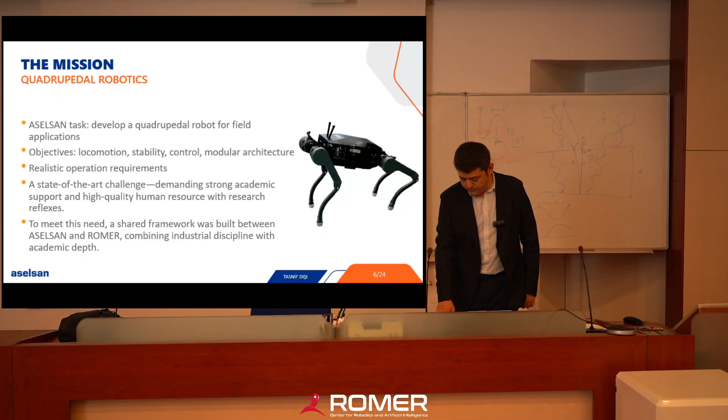So our mindset was product-oriented from day one. We had to deliver a usable, field-ready system, engineered for operability, not just for experimentation. So the TRL definitions were our guideline from the beginning. We were trying to develop a system which is TRL 7 or 8. I emphasize this point a lot to my newly started colleagues. The concept of technical readiness in designing a product is very important.

Producing something which works most of the time is not enough. When you are working in industry, you should be answering lots of questions, doing lots of extra work to come up with a product. And in this project, our aim was always coming with a usable product.

And the quadrupedal robotics was a new territory. We should define the concept of operations with requiring authority. This was an essential task. And by the requiring authority, we mean such type of movements.

This is a realistic operation case. So when we give a robot to a military personnel, they tend to behave like this. This is not a wrong thing, actually. They are working in the field, in very harsh conditions. And the thing that you supply to them should be robust enough to withstand such loads.

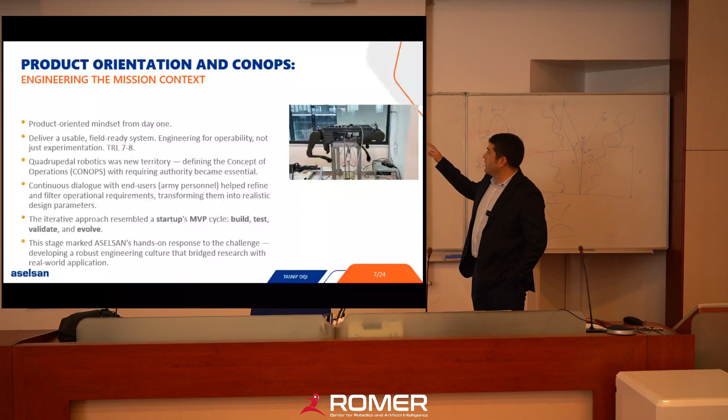So I will continue. This is how our design cycle evolved. First, we started with a single leg, then 2 legs. After that, we managed some tethered walking tasks. And before the project was closed, we were able to walk in different terrain conditions in the blindfold form efficiently. So this was, again, an evolved design sequence.

So the next part is, I think, the most important outcome of this study is the concept of robotic system engineering. So when we attacked this problem, we were aware of the fact that robot locomotion is only one problem. So the rest is system design. If you are after a TRL 7 or 8 level system, you should design a total solution.

You cannot just focus on locomotion software, but you have to focus on the total problem. And this requires a solid systems engineering framework. You need to make trade-off analysis under SWAP-C constraints. And you should integrate different disciplines together within the scope of the robot limitations. And within Aselsan, we developed a robotic system engineering sense in a multidisciplinary fashion.

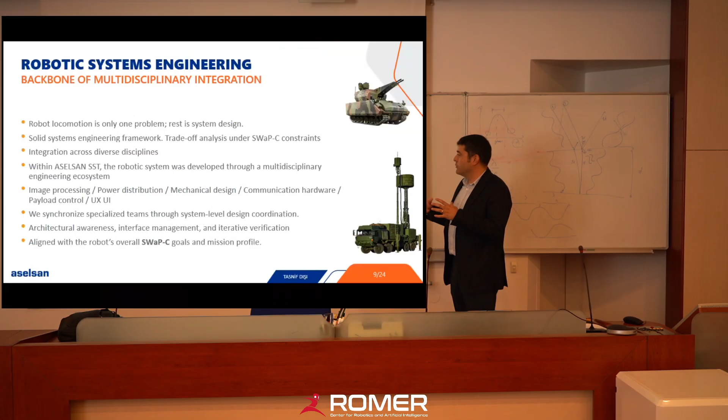It should be small, it should be power efficient, and our most important task was forcing every other design team to fit in that envelope. The SWAP-C goals were the most important goals that we sought for during this analysis.

And actually, this process was powered by a complete shift in mindset, and we had to move away from our comfort zones. By comfort zone, I mean it can be a proprietary, big closed workflow like MATLAB or MathWorks solution sets. We had relied on those type of expensive solutions to get a reliable and fast solution in our other type of systems. But in robotics, since it's an evolving and new area, you cannot rely on a proprietary software.

It was a hard task for us, but we managed to do it. We developed a seamless real-to-sim and sim-to-real bridges. What we see on the simulation most of the time would be what we see in real world. The simulated software could always be exactly exported and embedded in hardware. We forced ourselves to work in that fashion.

This was important. We used MuJoCo integration for physics simulation, and also a real-time balance and torque-based control is implemented with my team members. So our first prototypes were called Demir 100 series, which were built on COTS state-of-the-art robotic platforms, the ones you see above.

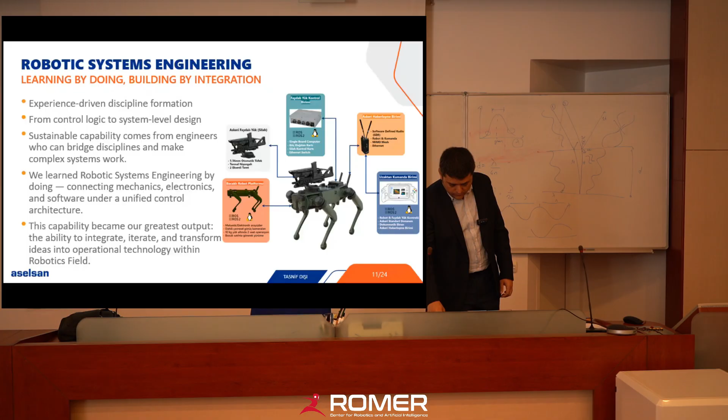So the next part is actually giving some details about what we achieved with ROMER, because all of the things that I have explained so far were conducted with Aselsan and ROMER collaboration.

So this concept, actually ROMER's role was idealized by Professor Dr. Erol Şahin. In a meeting, I think it was in 2022, he proposed the idea, he proposed his vision about how an academy-industry collaboration should be. He underlined that the academy should not be considered as a subcontractor, but as a co-developer.

So this idea resonated with me and with Dr. Mert Ankaralı, and together we formulated this collaboration. This collaboration, after it was put forward, was realized primarily with those professors, and Dr. Uluç Saranlı, Dr. Afşar Saranlı, Dr. Ali Emre Turgut, and of course Dr. Mert Ankaralı. They were our academic mentors and technical feedback-giving authorities. We conducted a co-development of algorithms and architecture together with them.

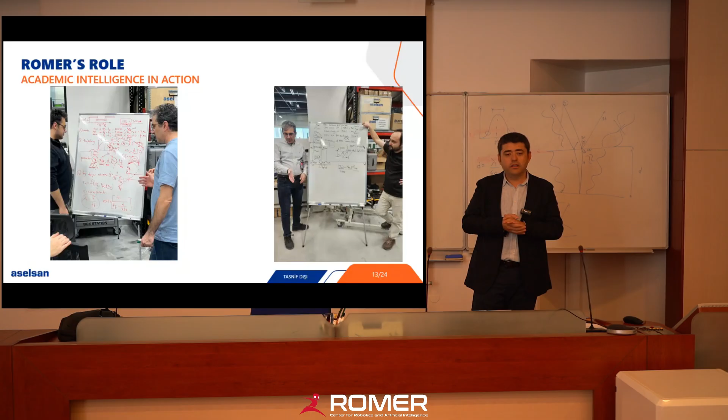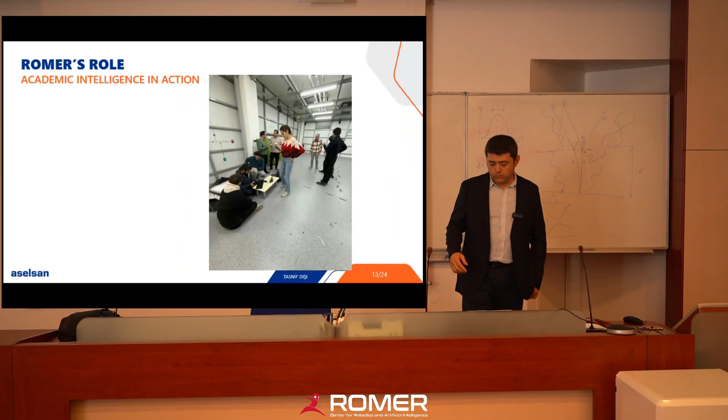We also had some collaboration with ROMER facilities too. ROMER has very nice laboratories. They have some motion capture systems. We brought some of our robots there and took some test data to improve the robot's locomotion algorithm.

Also, as a part of this collaboration, some of my colleagues were conducting their graduate studies and started to give some academic outputs. Here is a conference from, I think it was in Italy, and hopefully the next academic outputs are on the way. We are expecting our friends to continue this journey.

So this academic collaboration with ROMER was actually conducted in twofold. There are theses, publications and annual seminars, and it's a shared ownership of knowledge. On one side, there is what we call academic collaboration. In academic collaboration, our professors supported the graduate studies of Aselsan engineers through their academic guidance in the subjects

directly tied with leg locomotion, perception, and related fields. This helped continuous knowledge generation and intellectual depth to be implemented both in our company and in our colleagues. And on the other side, the task was design support.

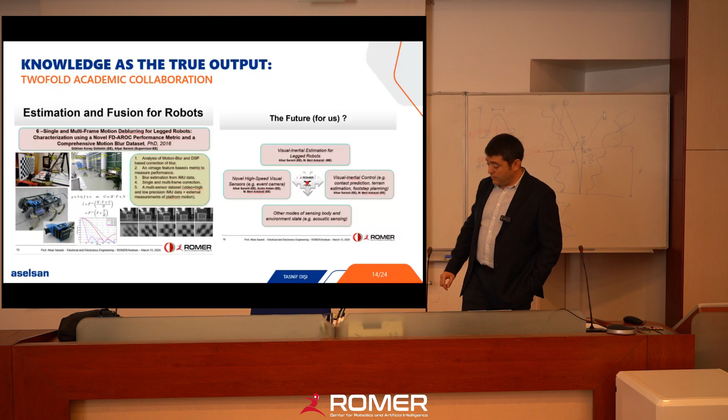Also, my friends explained how they designed the robot locomotion software in some of their presentations. We implemented some rule sets for leg locomotion, for balancing and gait scheduling. Those were direct outcomes of these seminars.

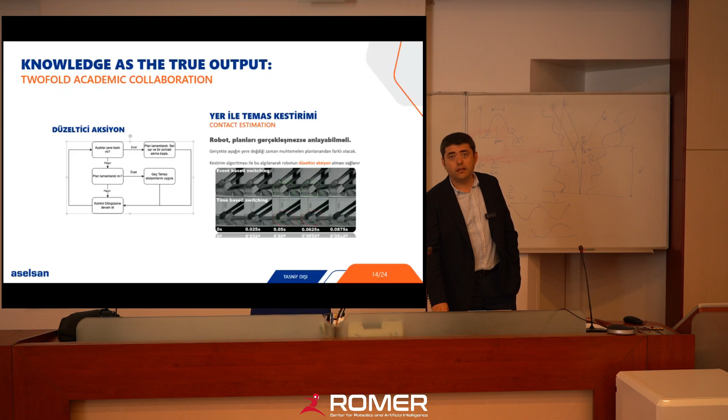So these seminars were actually the foundation of their thesis and their upcoming academic outputs, and we were directly involved in solving the locomotion problem. We didn't use any kind of closed software algorithm. Beginning from the system state machine to the generated torque values, all the pipeline, all the algorithms were designed by my

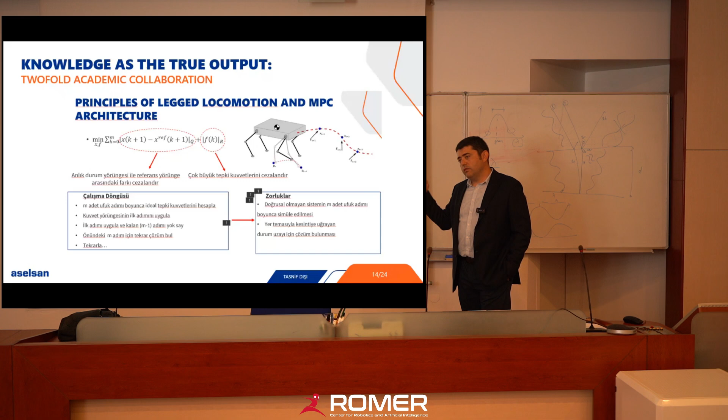team members. We were conducting the real time, the non-real time, the time logging, the display, every part of the problem. We were touching every part of the problem, and that's how we created a cumulative design methodology.

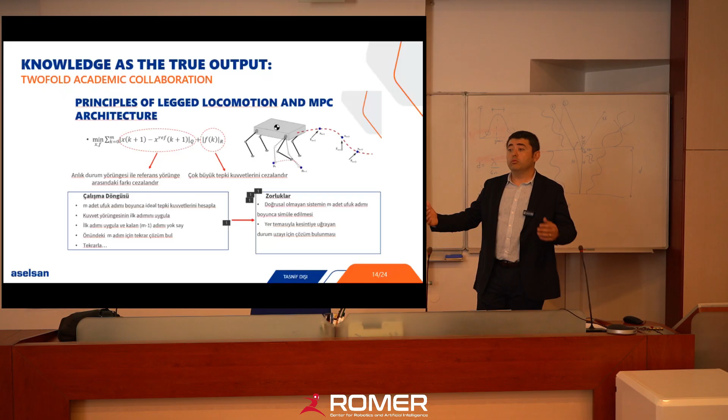So the last and most fun part, the outcome. I think the most important outcome of this study was the hierarchical control stack, which starts from gait planning, having the whole body control and the actuator control. This is the core of

the robotic control system, and you can use this methodology either in a quadruped, in a biped, or even in a robotic arm. This is how things work in the robotic field, at least for the time being, and having knowledge in that sense is the crucial part, is the biggest win in terms of technical side for me.

We also learned how to collect data, how to design an experiment while the design itself is going on. So the unit test philosophy is very important. We have a very basic understanding of conducting unit tests in our algorithm designs, and especially Dr. Uluç Saranlı had a lot of contributions on that to make us understand how it is important.

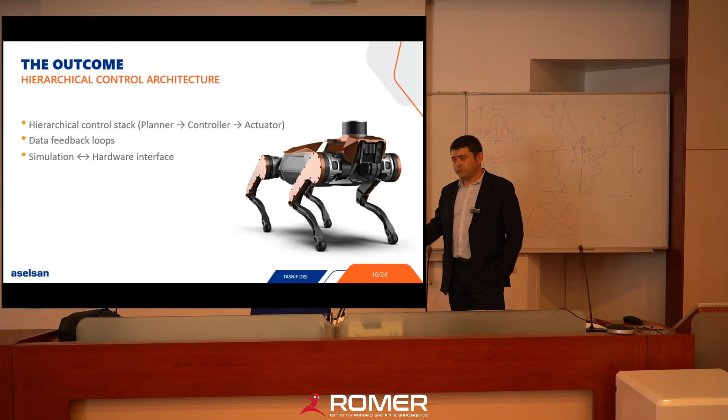And also we created a very nice simulation and hardware interface. As I said before, the code that runs on the robot is exactly the same running in the simulation. With just toggling a switch, we were exporting the code to the robot or to the MuJoCo simulation.

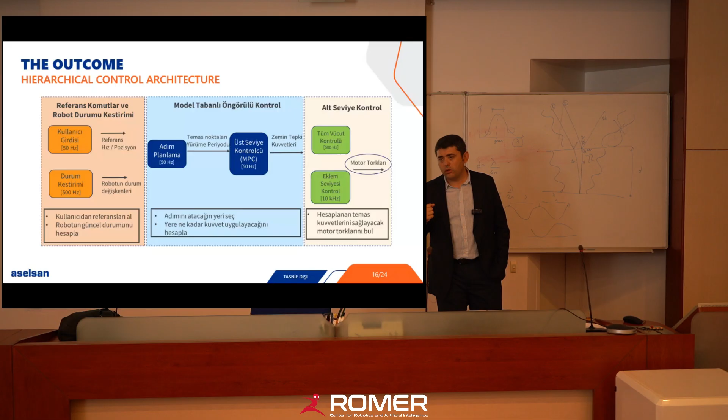This is the topology of our control scheme. First, at the top level, you speak with the outside world. You get commands, velocity commands from the user, and also estimate your robot's position and other related states. In the middle part, in our case, we were using MPC-based control. You schedule your steps and implement an MPC to adapt for the sensed ground reaction forces. And in the core, at the highest frequency, you apply a whole body control, and the outputs of this whole body control are directly fed to the robot actuators, the leg actuators. This is a layered hierarchical control architecture, and we have successfully implemented this.

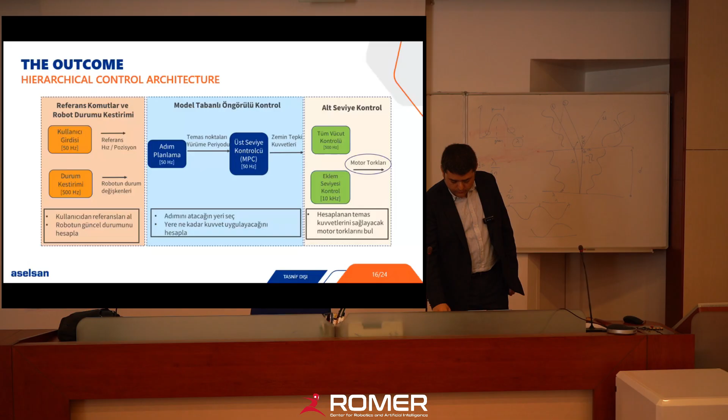Also, the user experience is the most critical part here. As I said before, we put a lot of effort into making sure that the user controller, the interface, is easy to use.

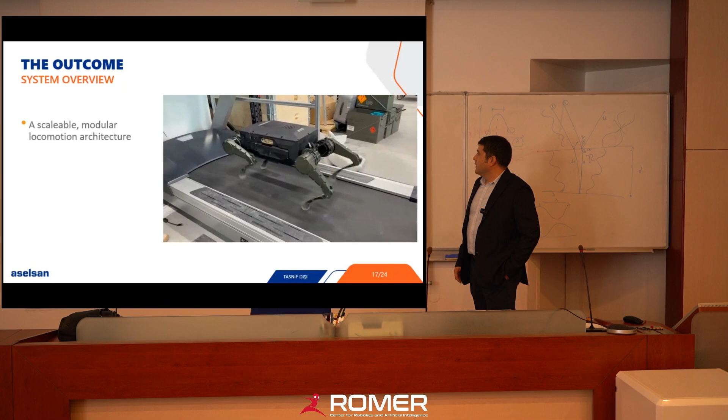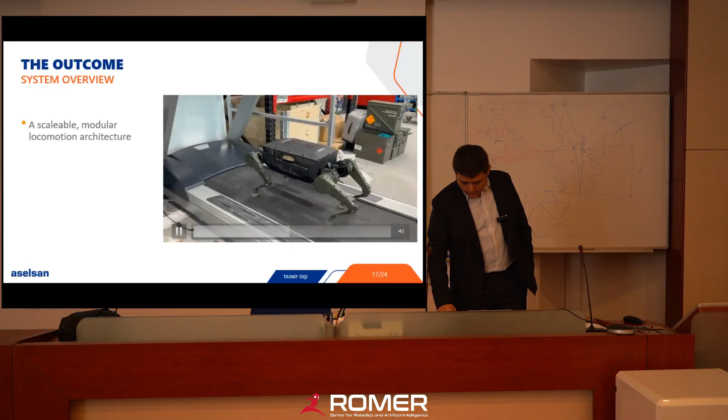So at the beginning, our robot started walking on a band. After that phase, we managed, in a blindfolded fashion, to come up and down through stairs. Actually this is a very hard task to do, at least for a team starting from scratch. Right now, I'm expecting my friends to write another paper specifically on this blindfolded stair climbing algorithm.

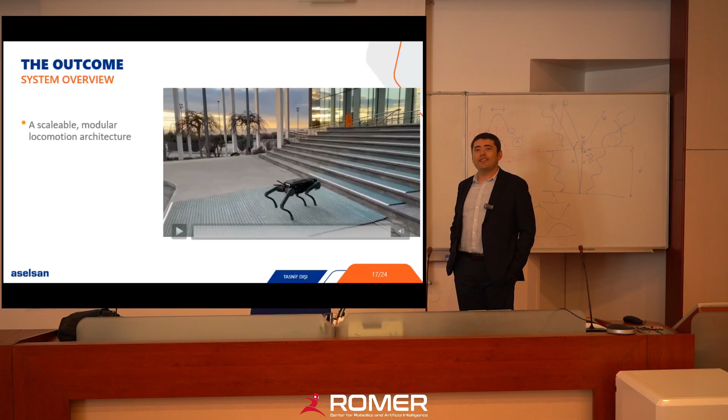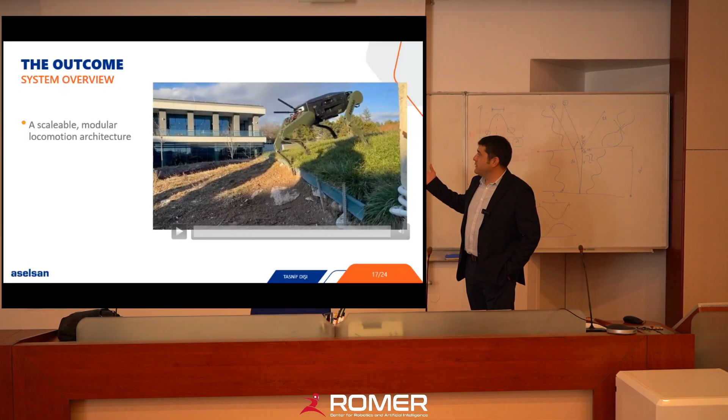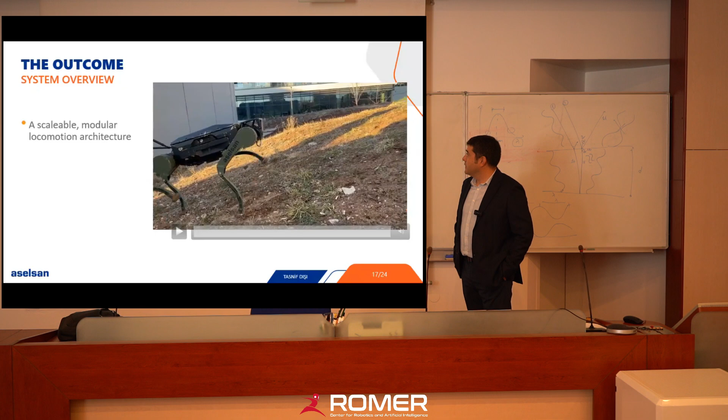And also, another tedious task: in unstructured terrain, when there is a very large gap, you should be proficient in going down or up that gap. Right now, the robot does not see the outside world. It senses it through its legs, and it walks in a blindfolded fashion. Doing this in the blindfold fashion is the first step that you should conquer.

After that, you improve your system's design with vision mode. This was actually our plan. We couldn't manage to conduct the vision mode side, but at least for blindfold walking, I think we were at a quite nice place.

So our plan was actually providing some systems with state-of-the-art, high-quality robots, learning how to design robotic systems with those types of products, which were expensive but high-quality. And in the long run, our intent was to replace all of them with a native, our own robot. That was our intent.

For me, I can say that up to the date our project ended, we were fitting in our schedule. Everything was going nicely, and I think, rather than being able to fully realize it or not, the most important thing is to show both the military and the other counterparts in the defense industry that this is achievable, realistic, and a high quality task. We managed to do this, and at least brought this concept to a certain level.

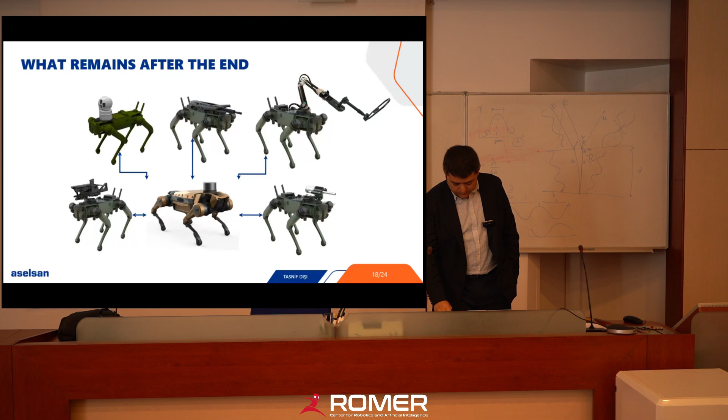So this is a video that we had planned to show this year, but we couldn't do it. So you are the lucky ones to see it.

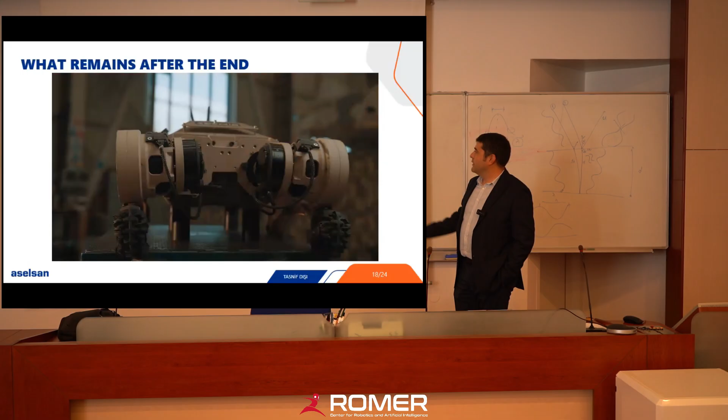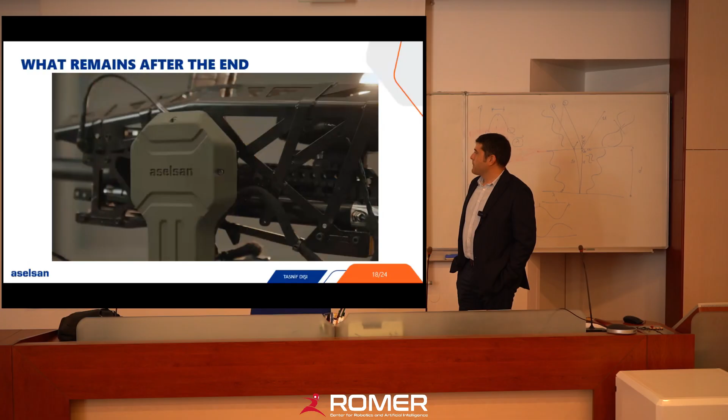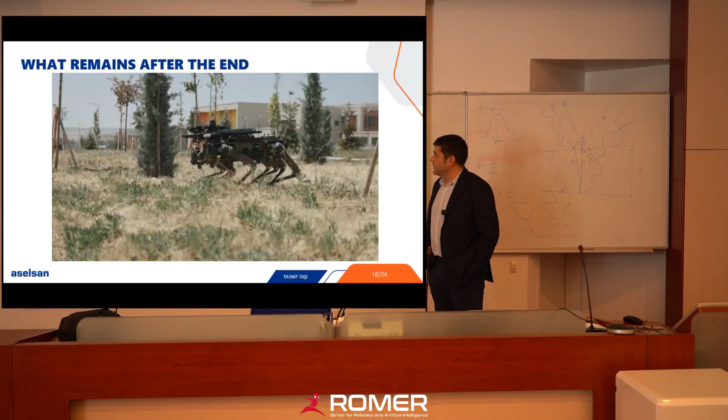This is a brief overview of our Demir product line. There are some military-oriented payloads, but you can see Demir 200, the native robot properties too. We have implemented some military payloads, and also made use of Aselsan's readily available features, things like stabilized tracking systems, image tracking systems. Also, our native robot was able to walk in unstructured terrain quite well.

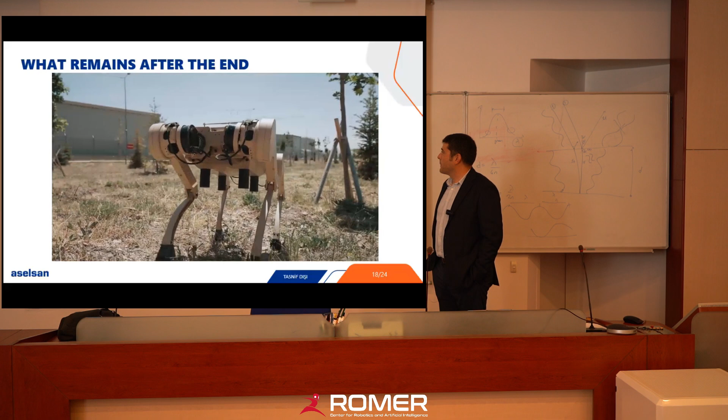So, to sum up, I think the project ends, systems evolve, but the knowledge stays. And that's the bottom line of my presentation. That was the important thing for me. That's the catchphrase of all of this study. So I think another very important thing about what remains after the end is the nice memories.

Before ending my presentation, I want to specifically thank my friends Hasan Can Özden, Ömer Tarık Banuş, Emre Tanfener, Hasan Öftun Orhon, Mehmet Şahin, and Başak Sert Boşnak. They were my team members throughout the study. I managed to do all of those tasks with their contribution. They stuck to the plan, behaved as we expected, and also flourished this field with their added value.

They were always beyond what we have asked, what I have asked from them. I specifically want to thank my team members.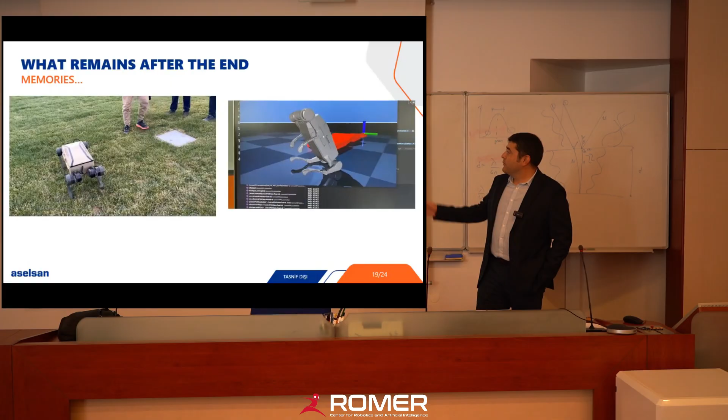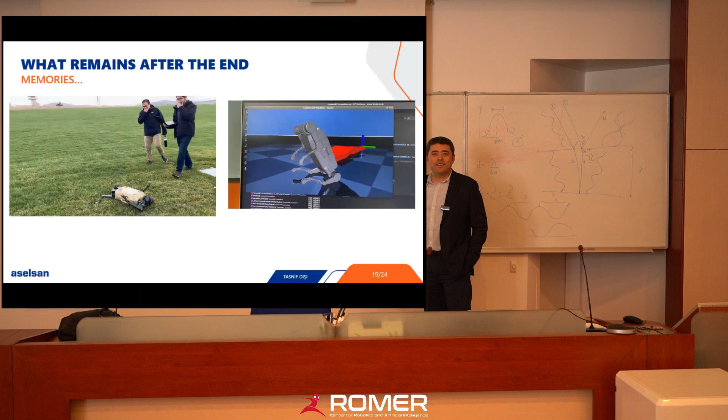And those were nice captures from our work, from the lab, or from the several items that we managed to deliver to the customer. And finally, we managed to do some nice fail videos. I think it's the most cool part of a robotic design task. Most of the time, being able to have a fail video is quite a nice thing. So this dude probably knew what was coming, but we couldn't read it. Our bad.